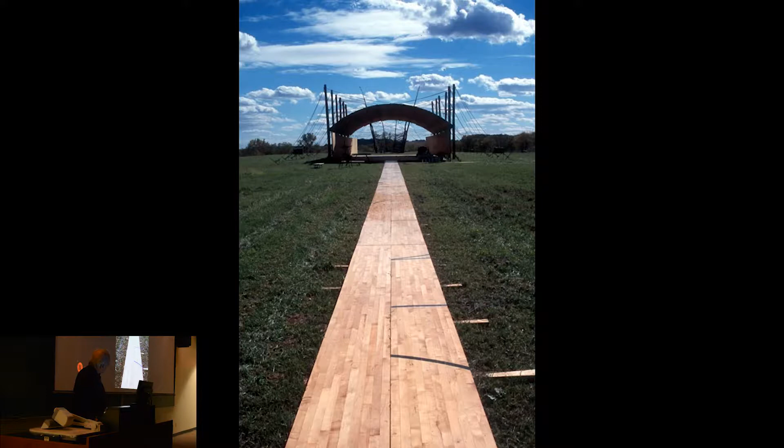So this is a wedding chapel built out on a farm field out of hackberry and felled cottonwood trees, directly on axis with the barnyard and the farmstead where the bride grew up. The idea was that the bride-to-be would walk down this temporary placement of basketball flooring, repurposed, under this great lamella arch to the chapel itself, where the event would take place on an October evening.

Following the ceremony, the chairs would be pulled back and the event would take place under this great lamella arch. We wanted to make something that didn't involve beams, basically something we could just make with skill saws. So it's made completely out of 2x10s, 75 feet long and 40 feet wide, and it's clear span, as you can tell. Once you get the calculus applied to figure out all the cuts, it was relatively easy to do.

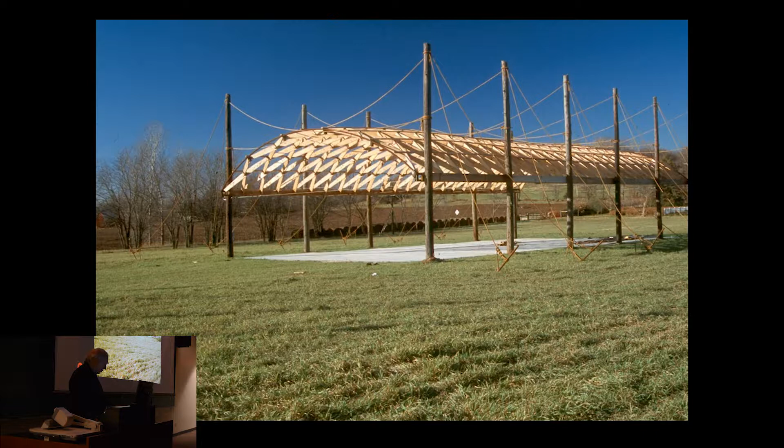So as the father of the bride, when my son-in-law-to-be asked if he could marry my daughter — he's the one on the right over there, and that's me on the left — I said, well, you sure can, Ian, but we got a little work to do first, son.

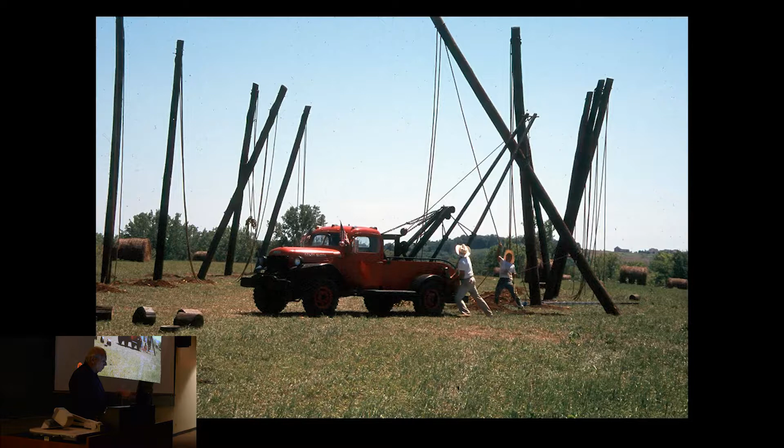So these are repurposed telephone poles from a utility or highway expansion, and I was able to use those. Those are sort of in stock, if you will, for the way I work. So we put that up and then went ahead and built the lamella as I've described.

and us. At that time, there wasn't anything that we designed that we didn't also build, and there wasn't anything that we built that we hadn't also designed. There are a few exceptions that you'll see here momentarily, but generally speaking, we do everything. It was really the only way I could find any comfort level within the client base that I had available to me, which was fairly limited.

In the end, it turned out we would sort of appeal to their pocketbook. They wanted something that was a little bit different. If we were going to be able to do all the building, we could save them some money, and that appealed to them probably more than the design, quite honestly.

I live on a farm, so that gives us a lot of freedom. There isn't much of anything that we can't make. So here we're welding steel trusses

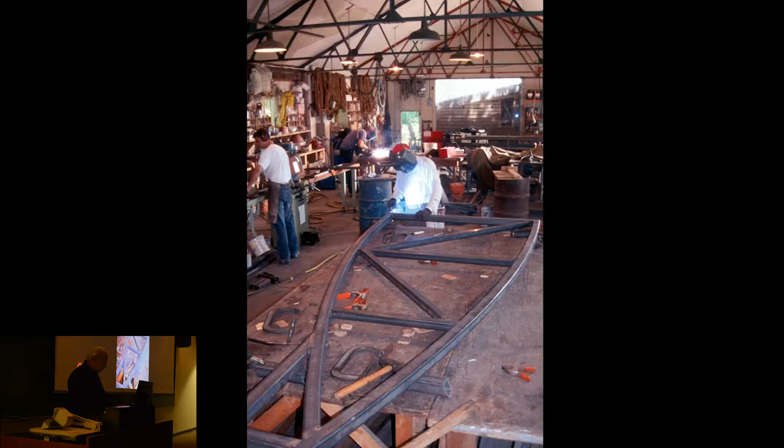for another house. We recycle, repurpose a lot of materials. All of this you see here is stainless steel. We bought out a cheese factory that had gone out of business, and all the stainless funnels and fittings and things like that we just bought for the scrap price. So we can make things out of that.

Make our own doors and windows. I don't need a steady diet of this, and frankly, I'll never do it again. But for that point in time and what we were trying to do with that particular project, it worked out well. We've done it maybe 2 or 3 more times since, but especially with the improvements in window frames—and these are incidentally thermally broken—we can't compete with industry.

So a project like this would be one that we would do in Lawrence, Kansas, in town. We bought a site and moved a house off of it. This is close to the university, so that we could produce this building.

A tower, again, reminiscent of these kinds of things that we see out in our landscape about every 15 miles apart. That establishes and begins to anchor that language.

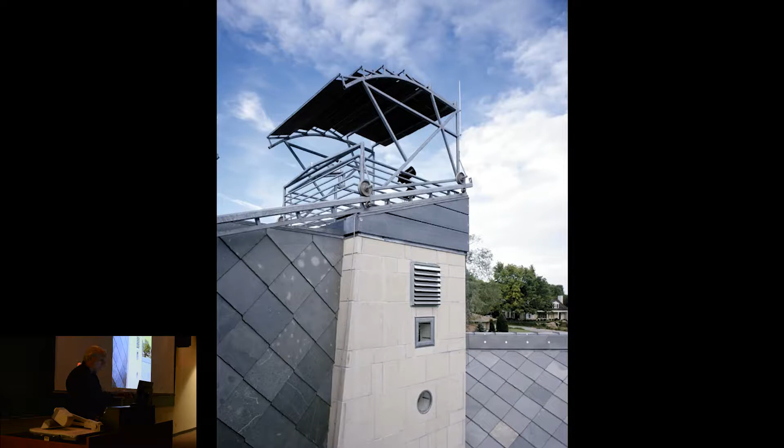I'll do anything to sell a client on an idea. So we'd usually trick them into thinking something that would work for them would be just for them—make it special, pretend it to work. This moves back and forth because they also had an interest in stargazing, and they could slide this thing back with just a boat winch. You can see right up through dead center on top of that tower, there's a mount that we set up there for them to bring their telescope and do some stargazing.

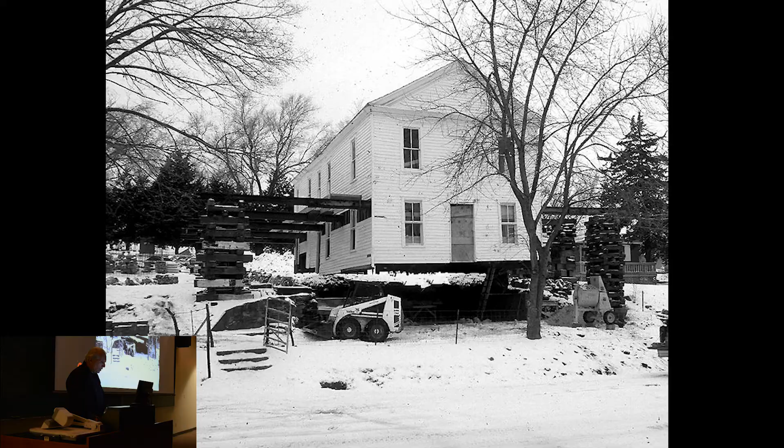We've also restored most of the Kansas historic sites, which is something I'm pretty proud to brag about. Of course, we didn't design those, and we do all the building and work with the state on it.

I had come from New York to Kansas to teach, and so I had a little bit of experience in historic preservation. When I came to Kansas, historic preservation was sort of a novel idea. They hadn't really restored anything.

Events that took place at this building led to the term Bleeding Kansas, and it was pretty significant, a turning point that ultimately led to the Civil War. So this is called Constitution Hall. We picked that up, dug out underneath it, put everything back under it.

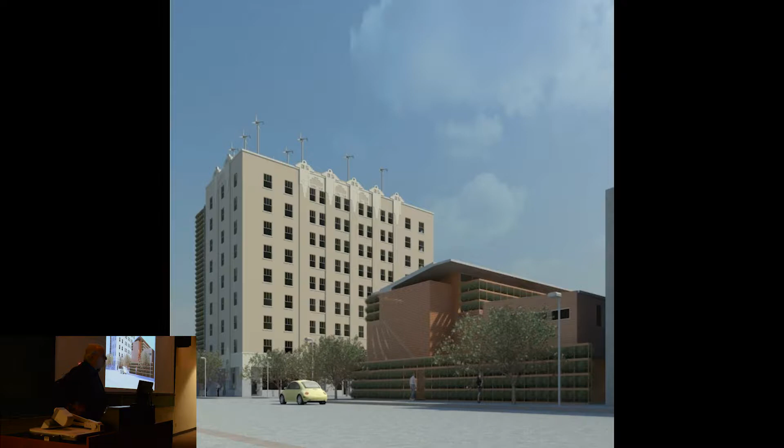The problem with doing all of this is that you sort of become your own worst enemy. Twofold: one is, because you can do everything, you don't know how to hold yourself back. It's like, oh, we're not going to use that toilet paper holder, we'll make one, and you just can't rein yourself in. You have to constantly check yourself, because these things lead your life.

We're all working with budgets, we all know what that's like. So the other disadvantage to doing all this work, despite all the romantic appeal of doing your own building, is you're very limited by a geographical area. I like to be home at night, and so we eventually kind of saturated our area.

We're still doing work there, but so when a developer, in this case in Clovis, New Mexico, calls and says, hey, I've seen your work published, we'd like to work with you guys, you wouldn't say no. It's the design that motivates me. I happen to be able to do the building, so there's no reason for me not to do it when the time is right. In this application and others since, I'm quick to grab hold of the design opportunities.

So in this project, we did the restoration of the Hotel Clovis, which is what you see in the background there. It was the tallest building west of the Mississippi for quite some time, all the way up through the 1930s, I think. And then in the foreground is a series of housing buildings that we did that would ultimately bring greater density to the downtown area. So it's a combination of a couple of projects we did there in Clovis.

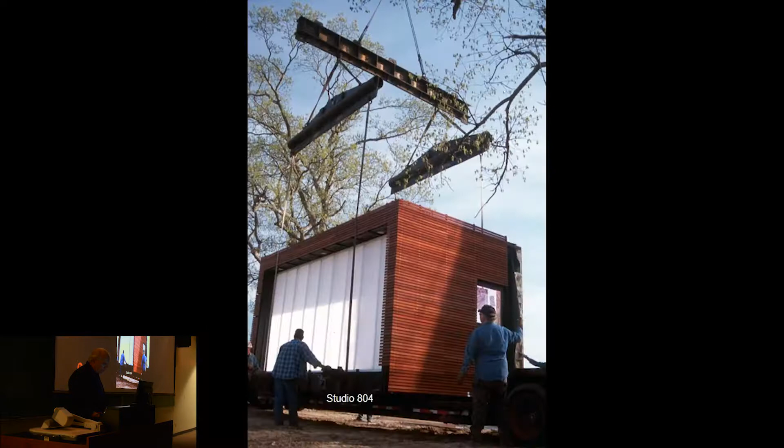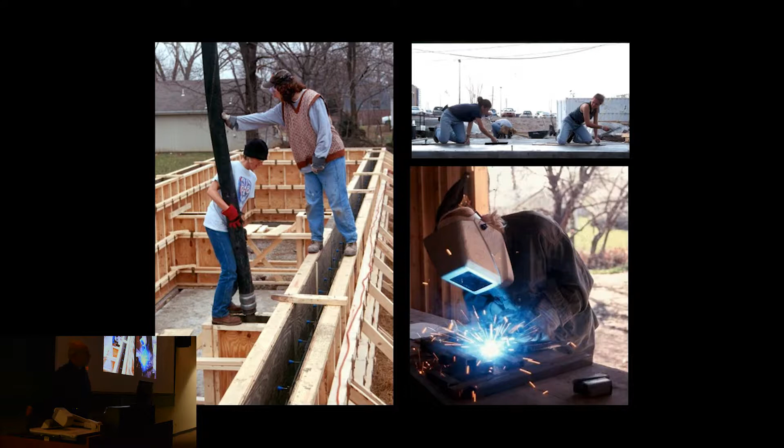So that's what I do with Rockhill and Associates, but I wanted to emphasize today what I do with Studio 804, which is building with students, and so I can go through this pretty quickly. We do everything, the same kind of thing I just shared with you that I do with Rockhill and Associates, we really don't subcontract anything.

A lot of times it's a judgment call. The students that I have vary from year to year, and my comfort level with them varies every bit as much. So it just depends on where we are, but generally speaking, the goal is to do as much of the work as we can possibly get done.

So I started doing these houses in Lawrence. We had done a couple of little projects out in the country before I started on the houses, and I had been teaching a course called Architecture 804. You might tell from the design studio, and it was the last design studio that students would take before they would graduate.

And it's the worst teaching experience you can have. I'm not sure if the colleagues here at San Antonio would agree, but you're literally blocking them from getting on in their lives. They already know it all, they want to work on their portfolio. I said, oh, come on. And so I got good work out of them, but I was always a little frustrated.

I had a project Rockhill Associates couldn't get to out in the country—putting a roof over a schoolhouse. We were going to do some rock work, but then build this steel roof over it. I asked the studio if they'd be interested, and they said yes. I couldn't believe what I saw—they were like drunk on the experience, pulling their cars around at night so they had headlights to work later. It was just amazing to see.

You teach long enough and you begin to see those little things that flourish. I was immediately taken by it, so I tried another little thing the next year. Pretty soon I was thinking, well, if I'm going to make this work, I better talk to somebody.

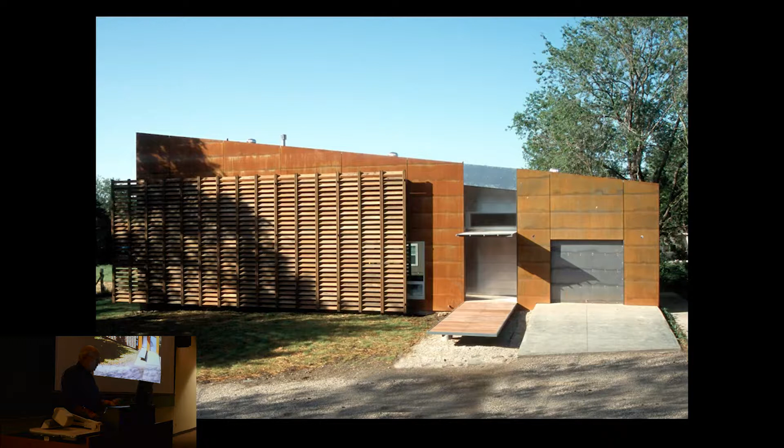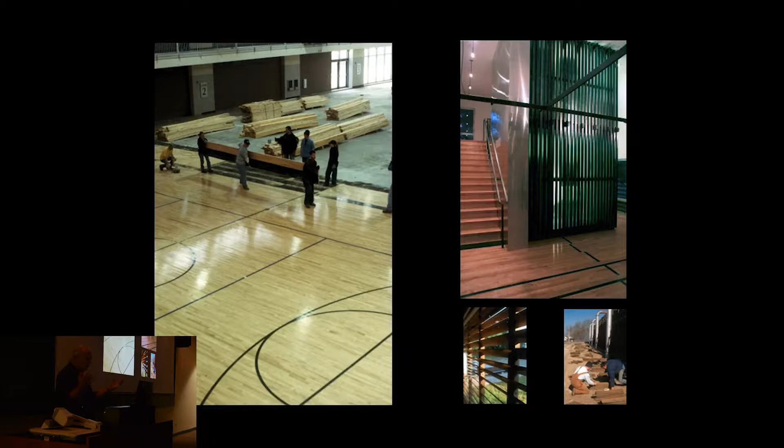This is now the fourth year—this would be our fourth house. We're still working in that affordable aspect of what we're doing, selling these houses for around $125,000, and repurposing a lot of materials. By now the architectural profession in the region knows what we're up to, and they want to support us.

In this case, three basketball courts were donated because of an insurance settlement—the architects called and said, hey, they're taking this out, do you want it? I said yeah. We were there within half an hour, hauling the wood back out. We used a lot of that basketball flooring, put it down free throw lines and all, and it just looked great. It worked out very well.

I don't do this to make them builders by any means—I do this to make them better architects. I also do it because over the course of my teaching career, I've just seen an amazing cultural change in what's happening to us.

I have very different students now than I did a long time ago. I think a lot of it comes from the age of consumerism, where you can get anything you want. The kids who built this little tree fort had to struggle to get a board up, figure out how to fasten it, cut something, keep from falling through. It may not be the best example, but this is now the stuff we get, this is what you see all over.

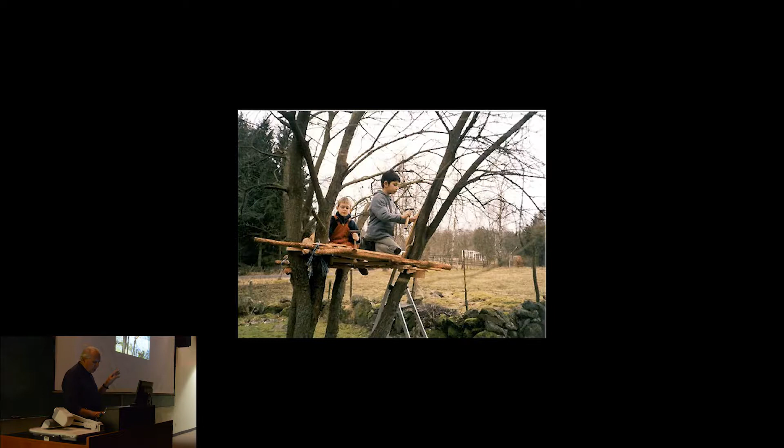And these things are very likely prohibited from most neighborhoods because it would be a little untidy. But these other things are totally acceptable. And so these kids then are sort of denied that experience.

Again, probably not the best example, but I come from an age where this is how we lived. We were always doing stuff with cars, et cetera. I'd be happy to see a kid in my studio take his or her hubcaps off. It would be great, just the idea that you'd make an intervention into what you're given and try to make it something special for you. I don't see that much of that.

Just can't help but point out that in Lawrence this year, they opened a Halloween costume shop. This is a little town of 80,000. You used to create a toga out of a sheet, whatever it is that you would make, and you'd have to think through and solve very simple problems, but you would engage design. But now, because of consumerism, you just go and buy whatever you want at the Halloween shop.

So all of this is getting away from us, and I think it affects the way in which young people think. They can do many other wonderful things, and I apologize to anybody here that feels insulted by that, but it's a very different world.

And I'm not the only one who thinks that. The literature is all over the place. All of these books are basically addressing the same thing. So anyway, I'm not alone.

Anyway, I feel like whatever I can contribute to it. In fact, my students, when I said I was coming here, said, you're not going to tell them about any Studio 804 moments, are you? Because they have it all day long. The things that they do just cracks me up. It's just their own innocence, but they haven't been exposed to a lot of things. So I'll show you one or two here as I get along.

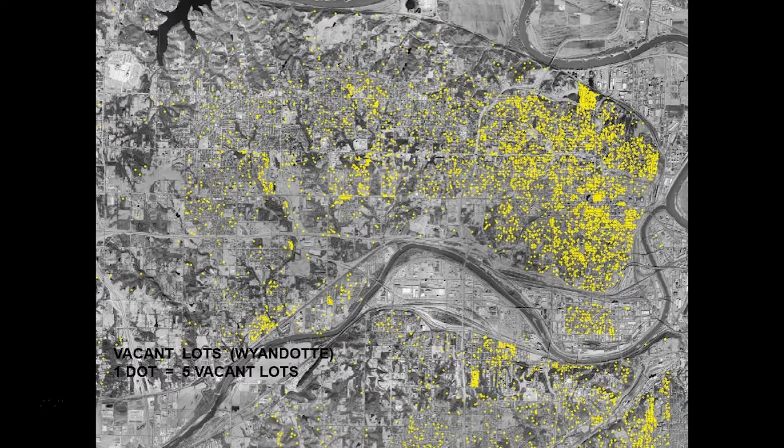So anyway, we did the 5 houses in Lawrence, and we kind of ran out of property. I didn't want to do any more projects out in the Habitat for Humanity subdivision, which was the last one we had done, not the one I shared with you, but one I haven't shared.

And so we went to Kansas City, and Kansas City is like a poster child for the flight to suburbia. I know Detroit gets all the attention, but these yellow dots represent 5 vacant parcels. It's not vacant of structure necessarily, it's basically vacant in the tax base. So basically, Kansas City, Kansas is decimated.

So we went to the CDC, the Community Development Corporations, they had about a dozen of them, a glorified name for neighborhood associations. I went to them and said, I've got some eager builders, and brace yourselves, here's what we do. It might look a little different, but what do you think? Wendy Wilson of Rosedale Neighborhood Association said, yeah, this is all right, let's go for it.

So anyway, then I was faced with the problem that my students were going to be commuting back and forth on I-70, the interstate, at 12 o'clock at night, and that didn't sit right with me. I didn't want to build it on site. I wanted to figure out a way to minimize that commute.

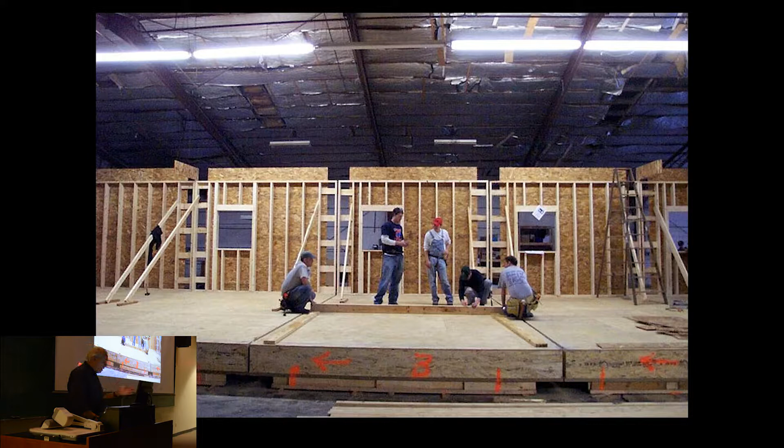So we seized upon this idea of prefabricating it. At the same time, the entire world became fascinated with prefabrication. I'd like to imagine I had some connectedness to that, but it was quite accidental. I just did it to get through this, and suddenly everybody's interested in what we're doing, which was nice. So we figured out a way to make it in a warehouse, an abandoned warehouse, make the whole thing, then truck it to the site and boom it into position.

Finish it out. This is one of the first that won the Home of the Year award. We're competing in a blind submission against professionals with $5 million buildings, and we sold this for $145,000. It was nice to see this shine in light of all the competition. I'm happy with that result.

We are completely independent of the university, so I'm not subsidized. We're literally hauling 2x4s and plywood and everything in our Hondas back and forth to the job site, anything to make this thing work. And I continue to be completely independent of the university.

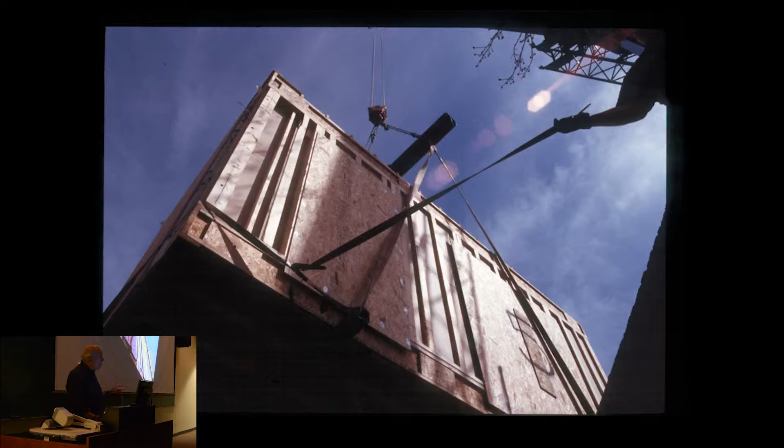What I'm starting to do now is realize that I can sell these, but I have to try to sell them at market rate if I can. I need to get as much out of these houses as I can, so I can continually slice off what might be construed as profit to put back into the program.

So eventually I could become my own developer, because at this point I'm still working with the community development corporations, and they're a little concerned, because even though the work looks different, they're beginning to get a reputation. They don't like the kind of pushback. This is all very conservative where I live.

Anyway, we sold the first one, word of mouth, that was great, and we sold the second one. This is the third one now that we did, and it seemed to be going very well. They were all sold, as I've said, easily. We never had to advertise anything. Once we got on that word of mouth, it seemed to work extremely well.

Then people were beginning to get in line, writing to me an email saying, hey, we'd like to have one of the houses, etc. I mean, they can see a good deal, because they understand the labor is free. I'm still trying to get something more out of it than just the materials.

But anyway, Kenny and Leo were happy, couldn't have been happier. They're willing to put aside the reservations that most realtors give about resaleability, schools, all the kinds of things that discourage people from settling in these older urban neighborhoods. But we were finding these young people, they all read Dwell magazine, they want something hip. They don't care if they're the only non-English as a first language couple in a 20 square block area.

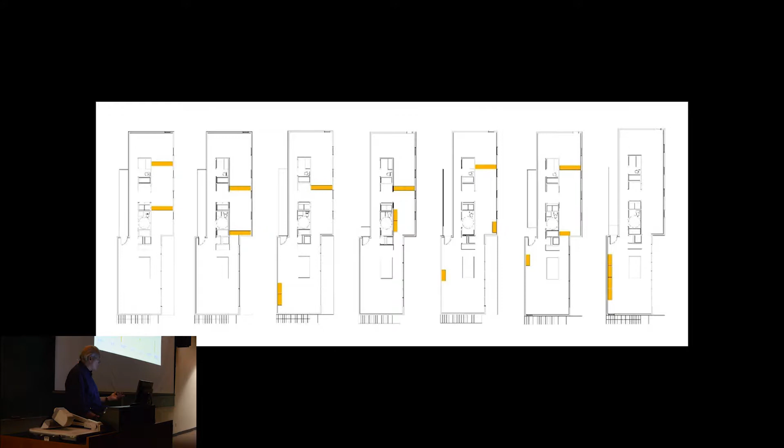So I don't expect you're able to see this very easily, but when I take the appraiser through, I've got 1 bedroom, 2 bedrooms, and 3 bedrooms because we slid those cabinets apart. When I take the urban hipster who reads Dwell magazine and wants loft living, we've moved all the cabinets down over here, so it's a big open area, and you're like, yeah, we like this. So we get the 3-bedroom appraisal, and we can trick the appraiser and pull these things apart, and it has that kind of potential, and it actually did work. We sold this last one for $200,000.

So we went down there and made a presentation. They had already decided that the city was going to build back green. Bob Berkebile, whom you may recognize, a leader in sustainability, his office BNIM in Kansas City had already made contact with them down there, and they were beginning to come back to build green for any of the city buildings. So we said, yeah, we can do that, let's go for it. This was the first time LEED had really begun to be something we could work with to make submissions.

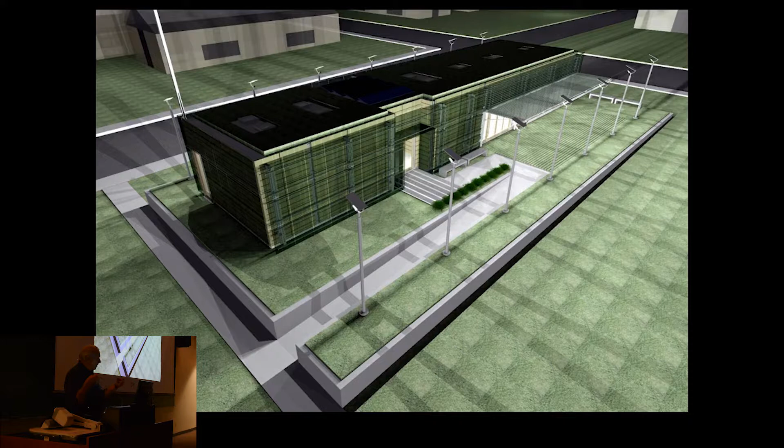So they put together a little art center board, and we met with them and put together the project. First, we had to get 4 contiguous pieces of property that we could take ownership of through the art center. One person was in jail in Junction City, and we had to get him to sign the deed over. We're still starting these in January, and we're going to be done, so this is pretty intense. Students are getting the deeds signed over. We're getting the property, 4 contiguous ones that'll give us a broad south exposure, which is what you see here.

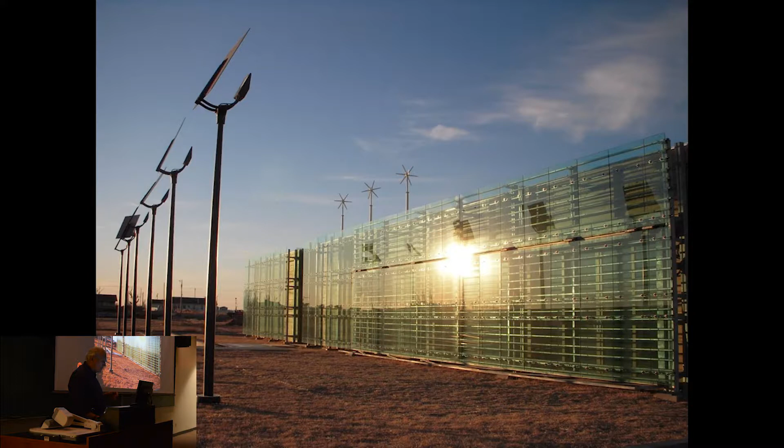And so this is the end result, is what you see here in glass, looking to the south. Now, just in case we didn't have enough on our plate...

In Kansas, right next door to us, no more than 15 miles away, is the largest, now former largest, production ammunition facility in the world. A 10,000-acre site called Sunflower Ammunition, where they would make loads for howitzers, Navy ships, bushel basket-sized loads, not bullets. 10,000-acre site, 5,000 buildings, and this is now going back through the process where they're trying to get it back into the public realm. They've demolished some of the buildings. We went to the attorneys basically in New Orleans and said, hey, we want to get some of those materials. You can imagine what we had to go through to get there, but the poetry of taking what had been basically a magazine building, one of 5,000 that were on the site, and putting that into the art center was a little too much to resist.

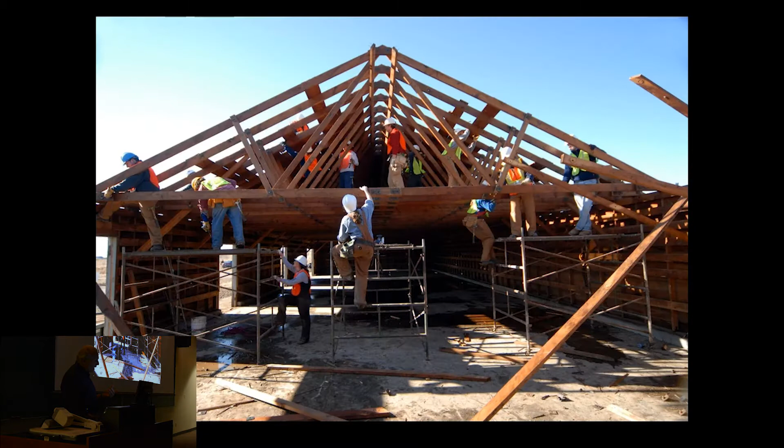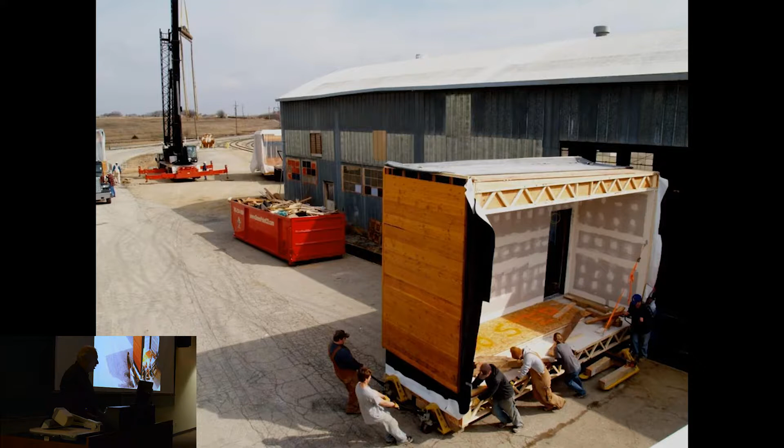So we went through, stripped that building out, brought it back to our site, and eventually used it to put together this, the same kind of dance you've seen ourselves do before. Now we're in a different abandoned warehouse, prefabricated in the warehouse. This time we took the side of the building out, loaded it with a crane, head down, raining hard. March 17th, St. Patrick's Day, we went down there. We were down there for 2 months putting this all together. Take it down, drop the trailers.

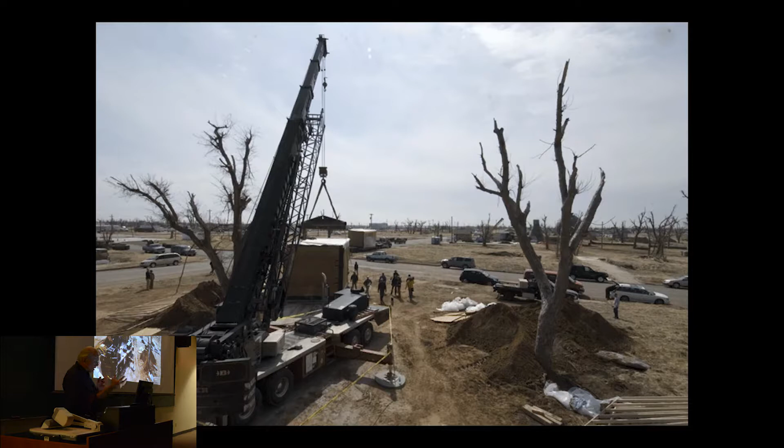So all the trees are torqued, we have to take all the trees out. It was an F5 tornado, so 200-mile-an-hour winds.

So we load these off and get them up, and then nudge them into place. To get the slings out, you have to leave them apart, get the slings out, and then we just roll them into position.

The only other thing that was back now was they were starting to rebuild the water tower. It too had been knocked out. You can see us in the foreground, and this is the old water tower that had been taken out.

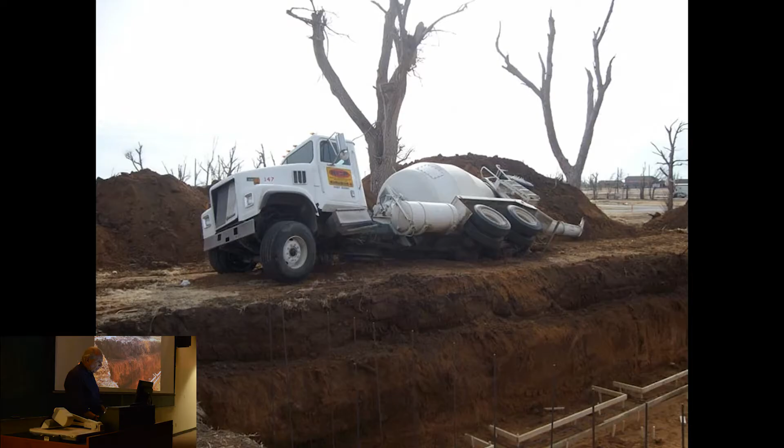So it's also a minefield. Nobody knows where anything is. This guy thought he did. So you've got tornado shelters, septic tanks, all kinds of stuff - everything is gone. You have no reference points anymore. This is actually our job, and he insisted that we were in the way, and the truck went in.

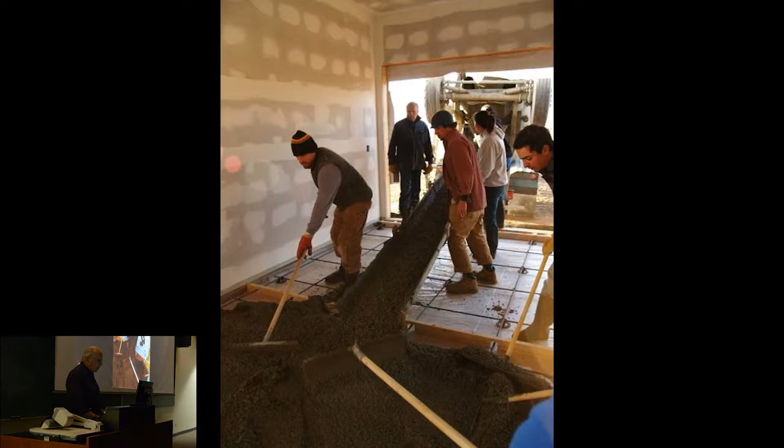So you go down there at that point in time and you talk to the concrete ready-mix producer about fly ash, and he's like, what's that? And so I explained - you're going to get in the business here, you may want to find out what's going on. And they did a remarkably good job. We probably placed over 200 yards of concrete, all of it with 20 or 30% fly ash, so they did a good job.

So concrete slab for thermal mass, all passive solar, south-facing windows, calculated shading. And then the idea that this would open out to the public was something I thought was really important. The artists don't care for that because the light affects the artwork, but that wasn't the only thing we were doing there.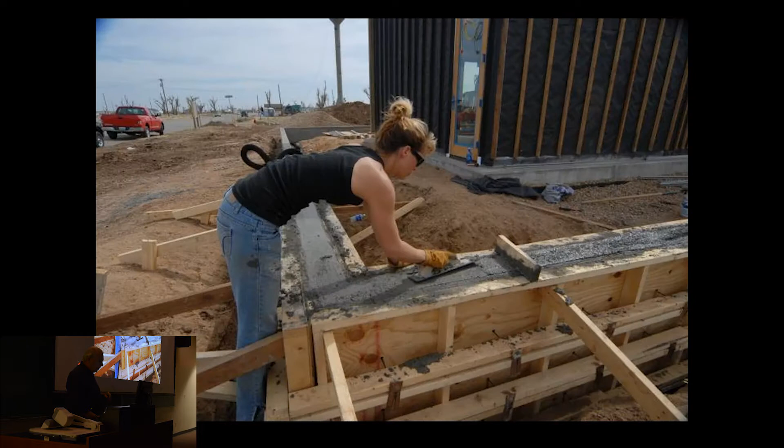Now the elevation in that part of the country, in Kansas, changes about a half an inch over 400 miles. I mean, it is really flat. And we just couldn't quite put this building down on that same ground. We wanted to elevate the building at least to give it a greater prominence.

And the other part of that was it would enable this to happen, because all that wall is purposely designed at 16 inches, which is kind of the height of a chair. People could sit on it and use it as you see being used here. And that was really an important part of this.

The sustainable aspects of this include 3 turbines. We could have done it with one big one. It looked kind of lonely. 2 looked like a couple. 3 looked great. And these were kestrels. They're from South Africa. Just the design of it looked appealing to me.

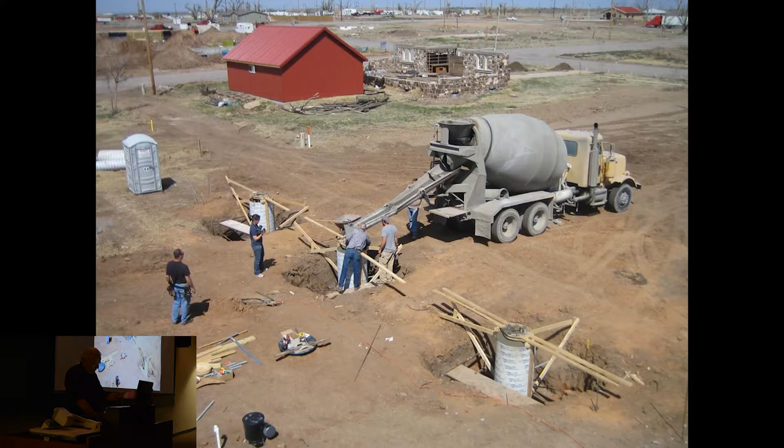So here we are putting the foundations in and getting ready to put it up. We figured on the other ones, we put the turbine on before we put the pole up. So that's a Studio 804 moment there for you.

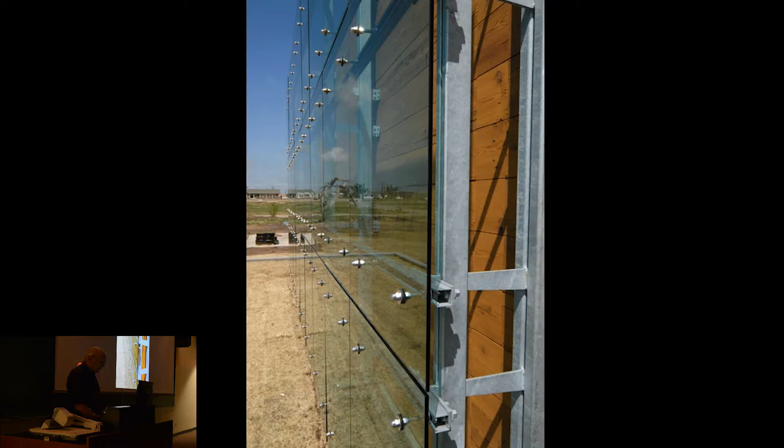So all glass on the outside, it's all 3/8 glass. This is from Suntex, it's from Vitra. I'm blank on the name all of a sudden, but anyway, what it does is it filters the UV rays.

So on the wall you see in wood, we have the wood from the ammunition facility, and then we filter that with these panels of glass that have this UV film in it that helps minimize the deterioration of that wood from the sun. And it also kind of thumbs our nose at the tornado business. It's very heavy glass, it's 3/8, so there's the finished product.

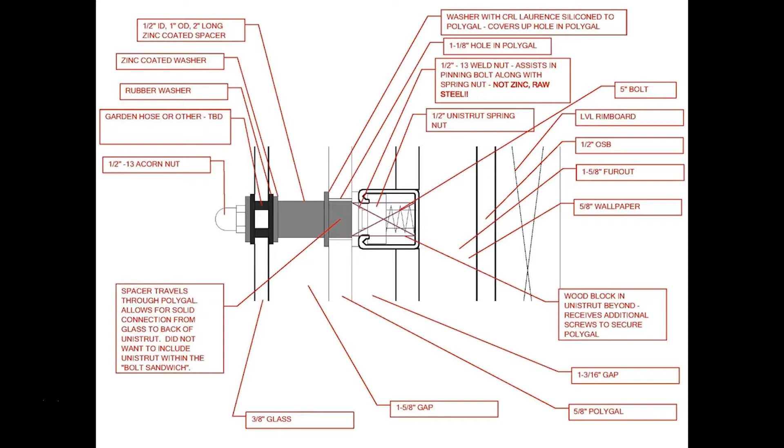You know, this detailing stuff is always fun. I think there's one up there that says garden hose. We had to have some kind of little buffer in there, so we tried to make these things up. Those kind of spider fittings that are now everywhere, they're just a little too predictable, so we wanted to make something - make a project out of it.

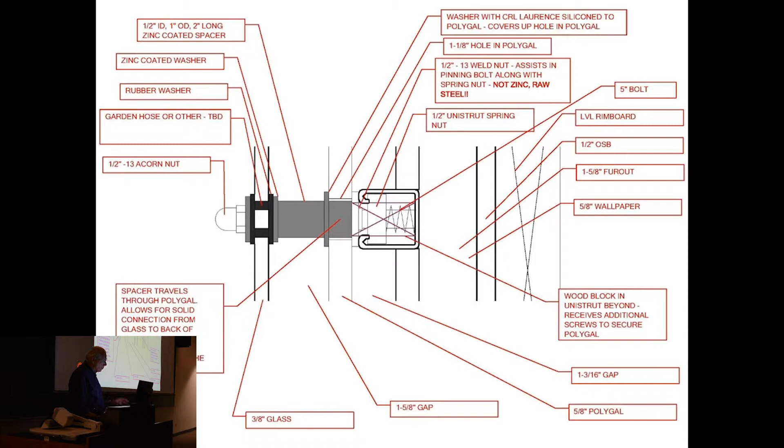So then I stagger back up to school, you know, because we finish these things and then there's a whole other group of students - oh, what are we going to do, you know - and so I'm like, oh my God, I'm exhausted.

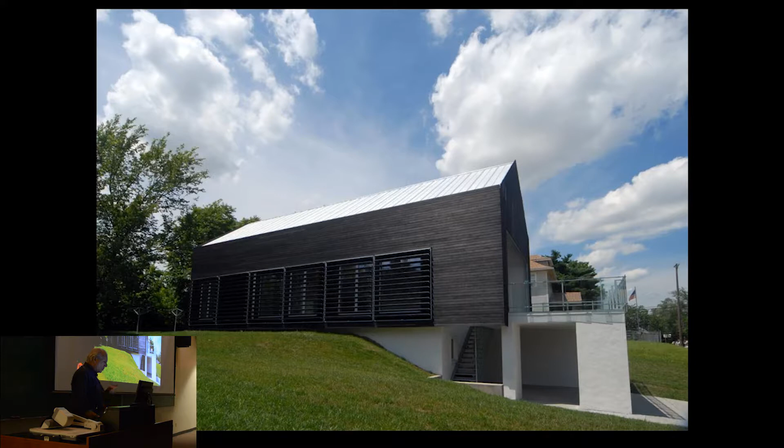So now this is going to be a LEED Platinum, and this is also passive certified—the first passive certified project we did. And this is now on another piece of property.

Now we just have enough money. I've graduated from having to go to these CDCs. We have enough money in the bank because I've been able to do these projects that I can save enough that I can basically get the property.

In this case, this property, all in the inner city, is $300 for two lots here. It's through the Homesteading Act—they're trying to infuse interest into the urban area, so they'll give you the property basically. $300 is nothing. So we get the property, and then we build a house, and I can sell it, and we start getting a little bit more profit. So I can basically be a developer, which has always been my goal.

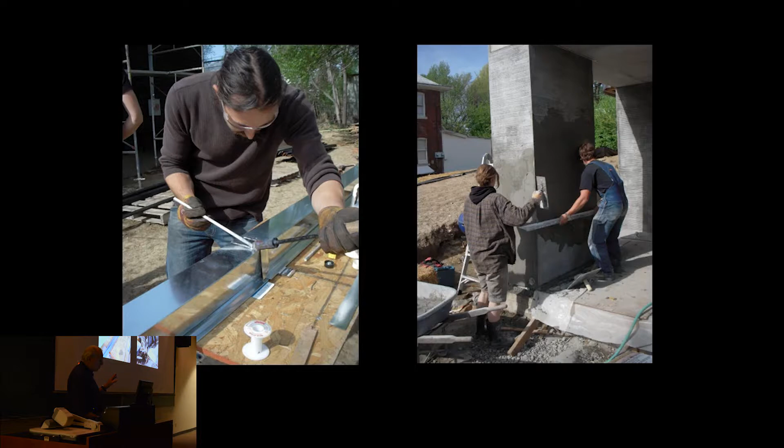So we do all the traditional crafts as well—soldering gutters, three-coat stucco. I don't care for acrylic stucco.

By now, we did all that work in Greensburg, and the dean of the school was a little red-faced because parents would come—we published internationally with that work—and parents would say, they're in an abandoned warehouse, there's no heat, the girls are having to go to the Kwik Shop to use the toilet, you have to run an extension cord from the back of the Kwik Shop to have power, or generators, whatever. Can we do a little bit better than that?

So anyway, he ended up buying and paying off solar as well. Passive is a little more difficult to attain—passive house certification—than LEED, but that's not to minimize LEED either. The passive stuff really works pretty well.

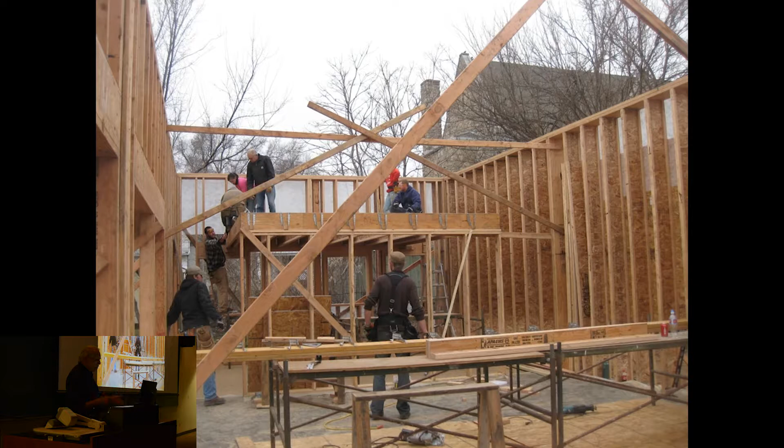So here we do flat work in order to get some thermal mass upstairs on the floor. TJIs we use for the depth of section to increase the thermal performance in all the walls. Blower door test before we close in, tight enough.

You can see all the construction joints have been caulked. We go around with a smoke pencil to see if we fail, to get that as tight as it should be. Here's a Studio 804 moment.

The floor—we do the flat work and then we would put curing compound on it. Curing compound is like the consistency of honey, and you put it in a pump sprayer, spray it out evenly, and it scuffs off over time so the moisture isn't taken out of the slab too fast and causes it to crack.

I just can't be there to do all this stuff, and garden sprayers are notoriously difficult. I said, here, pour to the students—pour this in here, make sure that you get it as even as you can.

So they think that the end of the garden sprayer is actually a plug that's in there. So they take that little thing out that causes the fan, and then the stuff comes shooting out like a fire hose, and they thought, well, yeah, that's the way it's supposed to work. So it's just all over the place in various thicknesses, it's just gummy. So I come in the next day, and I'm like, what did you do? Oh, we thought that was the way it's supposed to be.

So I have Leon just livid, and I'm like, oh my God, okay, we're going to build a house, we're busy here, we can't mess with that. So we build the whole house because we run out of time, we end up having a big open house. Everybody comes in, and they go, man, the floors are awesome, how'd you do that? And I'm like, oh, yeah, it's an old trick. So, anyway, yeah, stupid things that happen that end up working out quite nicely.

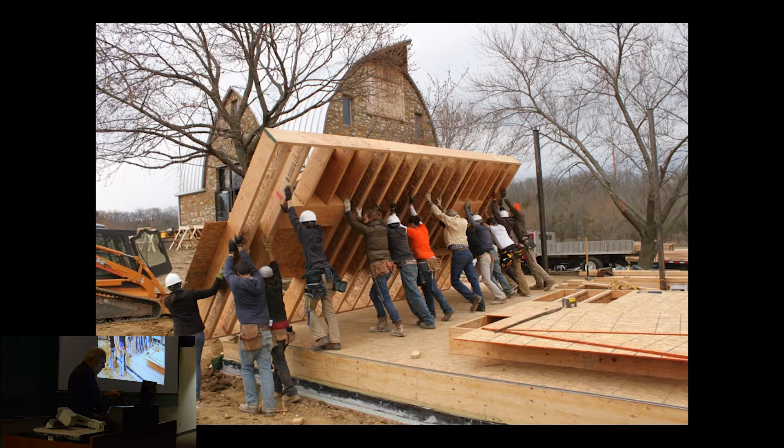So same thing, big thick TJI, standard walls up, maximum insulation. We make our own curtain wall in this example. Curtain wall is normally 2x4 aluminum extrusion, and other than increasing the depth, it's also about as grim as garage doors. But the idea that we can make this at a 5/8 inch bar stock, we could still get a thermal break because we found an extrusion we could use to do that with. So we make our own curtain wall, and that's what you see us doing here.

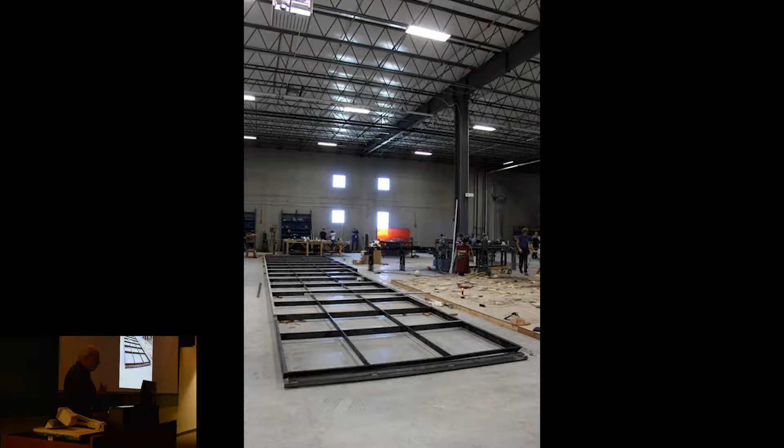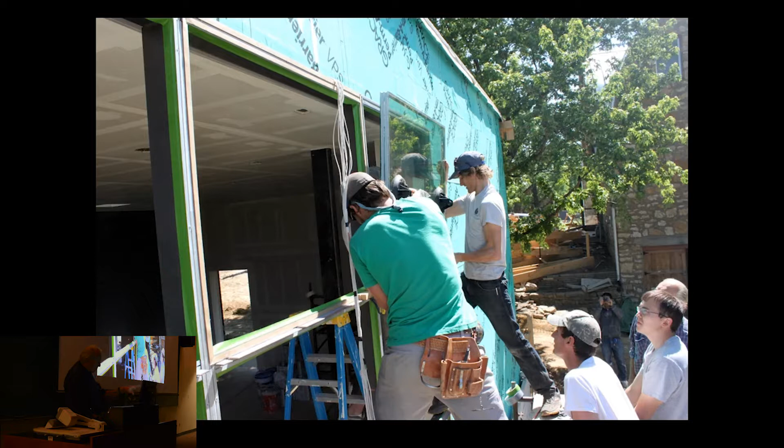And then we put this up. This is electrochromic glass, so it's going to be self-shading. I'll show you how that happens in a moment. But all the glass gets wired with low voltage wiring. We put that in, so they're tied to our GPS coordinates. It's controlled by a motherboard in Minneapolis, and they know when the sun rises and sets. So they can control the shading of it per the season, and they can even take into account if there's a tree that would block it. So it's pretty interesting technology.

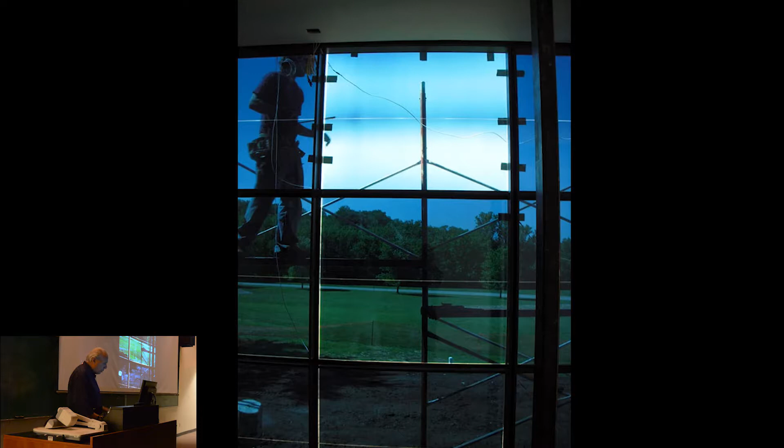And again, because we're doing these kinds of things, we get industry looking favorably to try to partner with us. So it works out pretty well. And for once, I didn't have to do louvers, because I'd spent my entire career doing louvers on the south side of the buildings. This is a 10,000 plant living wall that is thriving.

This is Valcucine, which is an Italian line of cabinetry. They also worked with us. All of their line of cabinetry is glass and aluminum, all 100% recyclable. So here's the limestone - these are tailings that we get.

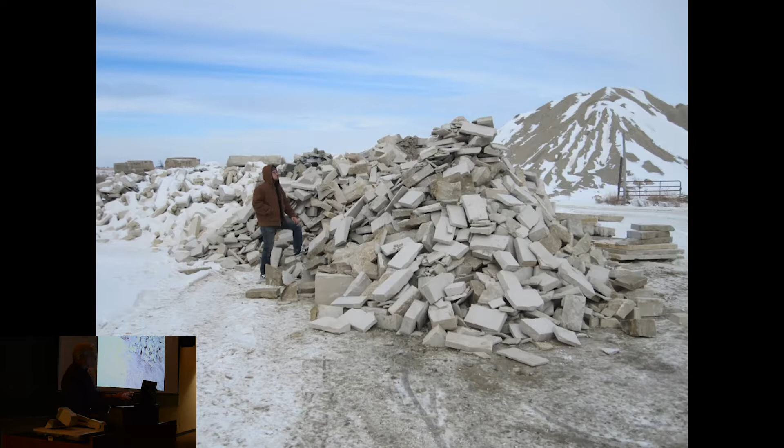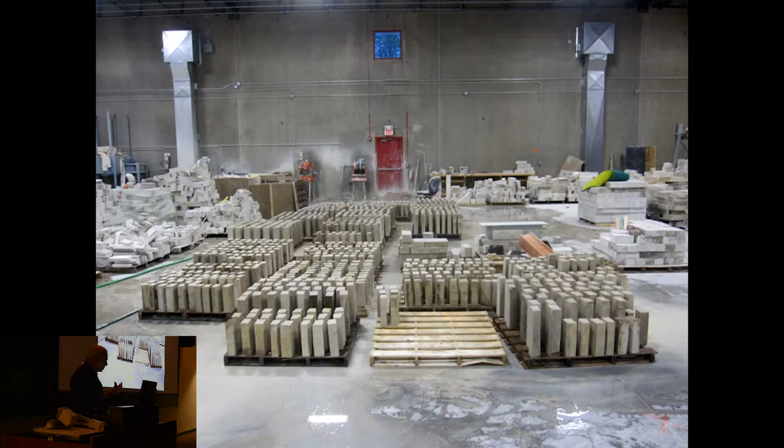So the limestone people were happy to just have us pay for the freight and haul it off. We bring it into the warehouse and cut it all up into a coursing that we could use. So that's what you saw there, all made out of limestone.

Then we did another project over in Kansas City at the community college. They wanted a sustainability center. Again, the previous one was LEED Platinum, and it was also the first commercial building that was Passive House certified. So we went and did this one.

This one we made out of chalkboard slate, which is kind of interesting. I hope most people understand that's not faux slate. In grade schools years ago, they literally had slate, a building material, on the walls. When demo contractors knock out these old grade schools, they know it's of some value. So we bought three truckloads of chalkboard slate from Cleveland, Des Moines, and Minneapolis, then cut it all up and basically just screw it to the outside of the building.

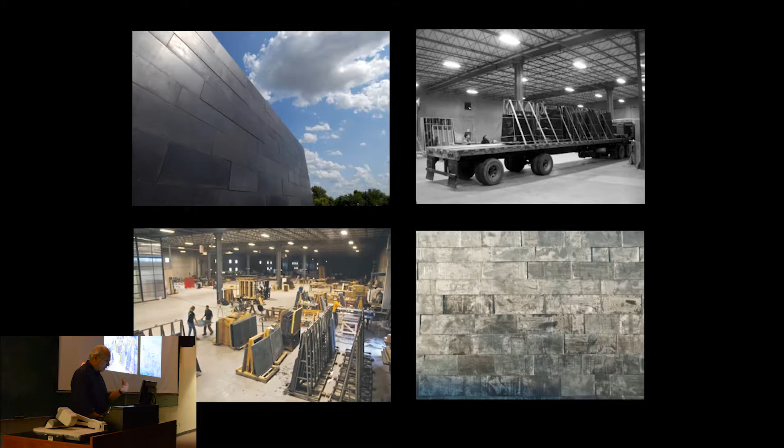This building we did is EcoHawks, and I was talking with some others here. It always takes somebody who believes in you to make these kind of projects work. JoAnn Browning, who is now the dean of your School of Engineering here, was at KU and worked with us on this building. She said the nicest thing, that we varied from the design vocabulary that the architects had sort of designated.

We have our campus architects, if you will, and they had designated a design vocabulary for this whole West Campus development. It just wasn't anything I warmed up to very easily. We were doing work here for mechanical engineering - they convert cars to battery and do research. Long story, you'll see in a moment. But this language of aluminum and fabrication was really important.

So we made the skin, and proposed making the skin, and the university people didn't see anything nice about it. They said, you can't do that. And JoAnn Browning said, oh, yes, they can. We're paying for this, and this is beautiful.

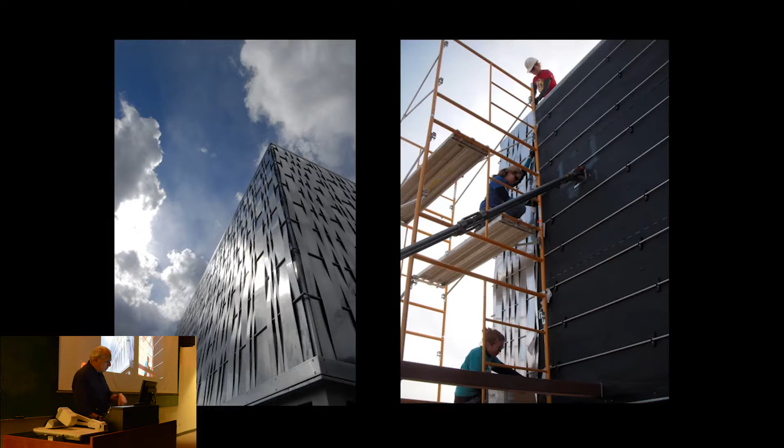So anyway, this is the skin that we developed. Three young women worked on it and really pulled it off. A lot of this came through with VaproShield's development - they're the ones who give us the rain screen on the outside, that's the black. They had just come out with a product that was basically super UV resistant.

We'd always struggled with rain screens because the UV deterioration was always our nemesis - they wouldn't last that long. So in this one, they had just developed this and they were behind us to do this project. So anyway, that's what you see there.

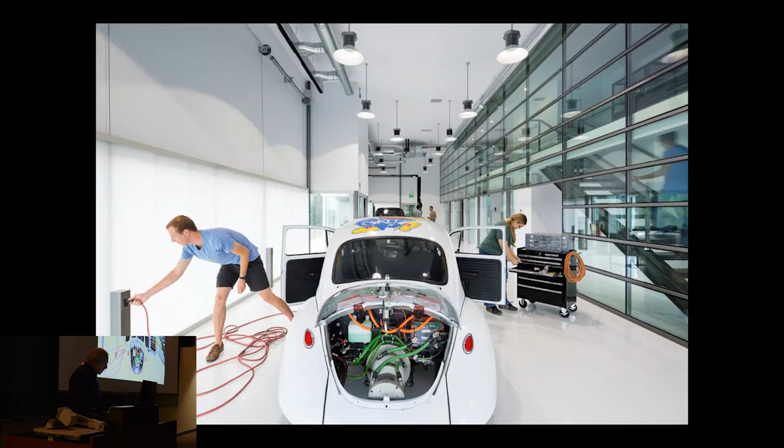And there's the finished project. This is the inside. This is kind of what they do - it's basically for graduate students in mechanical engineering who become part of this program that I've described.

So then we did an addition to Marvin Hall. This is the School of Architecture now, and this addition has been talked about for as long as I've been at that school, probably started long before that. It was built as an engineering building, and they never had anything where groups could congregate, so all of our students were taking lecture courses in other buildings around campus. We counted 23 courses where people were going elsewhere. So we got to do something - we eventually convinced the university to let us go ahead and do this addition to the School of Architecture.

Continuing with that spirit of design and sustainability, we've sort of mimicked the original structure of the old building, which is basically a timber frame inside with stone walls, limestone walls on the outside. In this case, what I thought was really important was to pursue a double wall - there are two walls here you can't discern very easily, about 40 inches apart. They're glass, and the glass on the inside is not the same glass as outside. Within that are louvers, and you'll see all this in a moment. Then this elevated floor becomes something else for positive displacement ventilation. Both of these are driven by our interest in LEED.

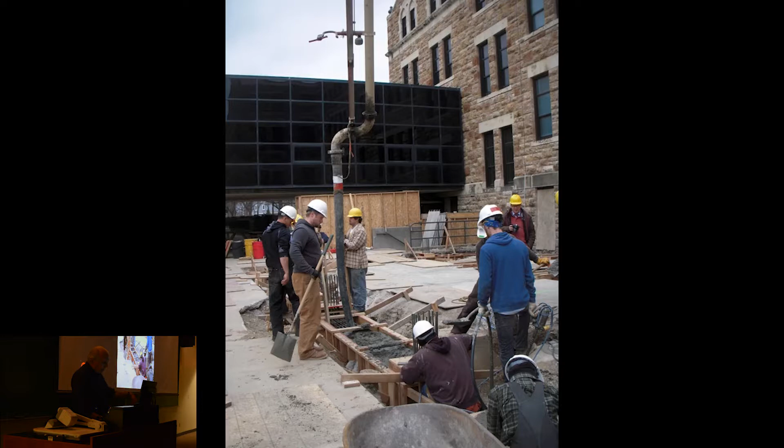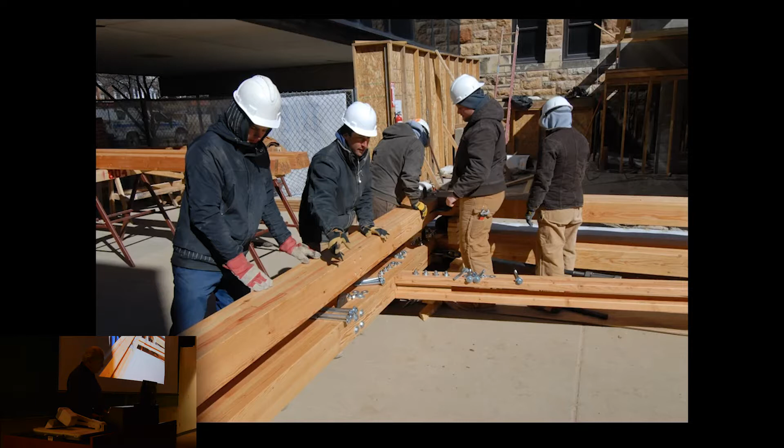So here we do grade beams that are basically standing on top of 14-foot deep drilled piers in the shale, pick up those loads, and then we do our form work to make what you see here to get the beams, and then we ultimately set the building on top of that. And then put up our own timber, engineered lumber frame on top, and then start to get closed in.

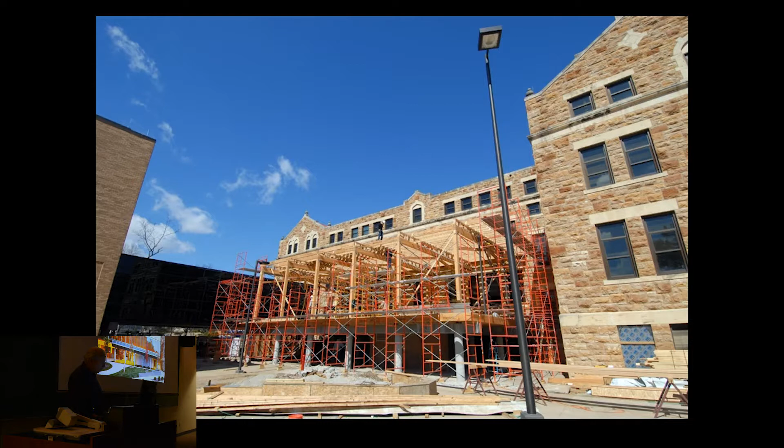And then the louvers go in. So we set the glass on the inside, then we set the louvers, then we set the glass on the outside. The louvers basically track the sun, and their purpose is not only to control the heating within the space, or lack of heating.

So if you imagine in the wintertime, when the air between the two spaces is trapped, it's like when you go to your car in the wintertime and it's been in the sun, it's actually kind of warm inside. It's not nearly as cold as it is outside. So that's the most rudimentary concept, kind of like a warm blanket.

But then in the summertime, when we don't want it to overheat, we have louvers on the bottom here behind these grills, dampers that open, and then open up above here, so you get the stack effect, and it kind of pulls cool air in from on the underside of the building. So it's kind of simple, but I'm pretty sure it works fairly well.

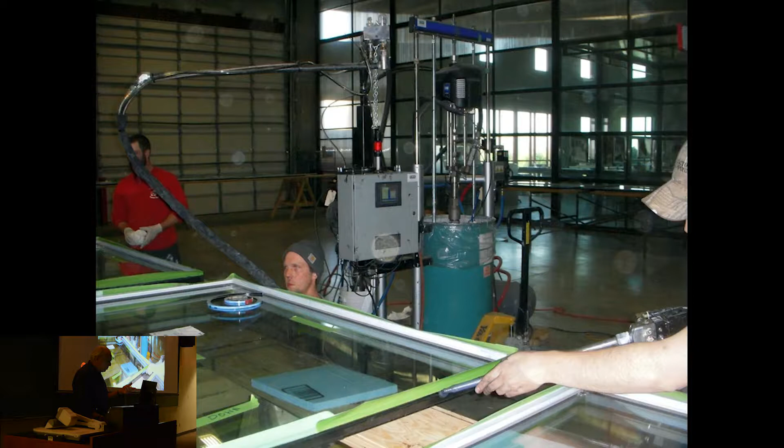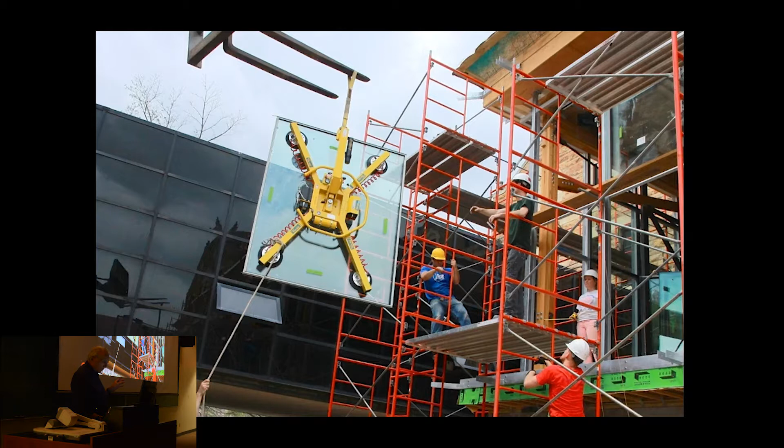We make our own glass. This is a cassette system, so we get the glass from Oldcastle. We bring that in, and then we do a silicone, an epoxy silicone. It's a clip system, and you'll see here in a moment. We bring these sheets over after it's cured, and then we boom them in. But the difference is, I like that smooth surface, not these snap-on grills on the outside.

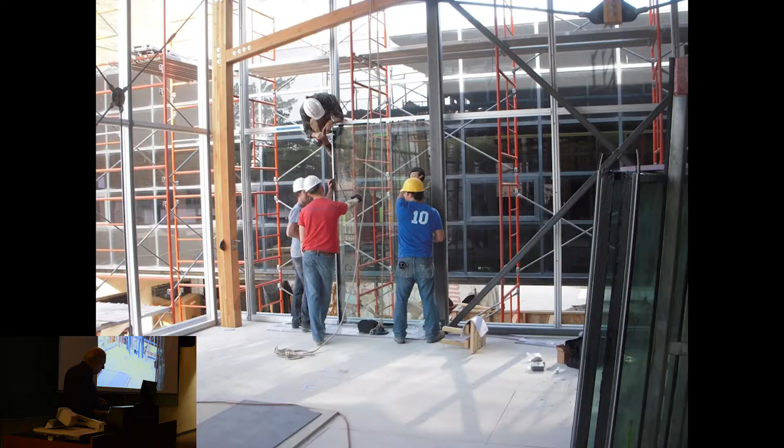So you'll see here, we set it on the inside. This is basically what we call wet glazing. So we put the whole thing together that way. Here we are setting the inside glass, set the louvers all the way around. That's clear Western red cedar, all heart.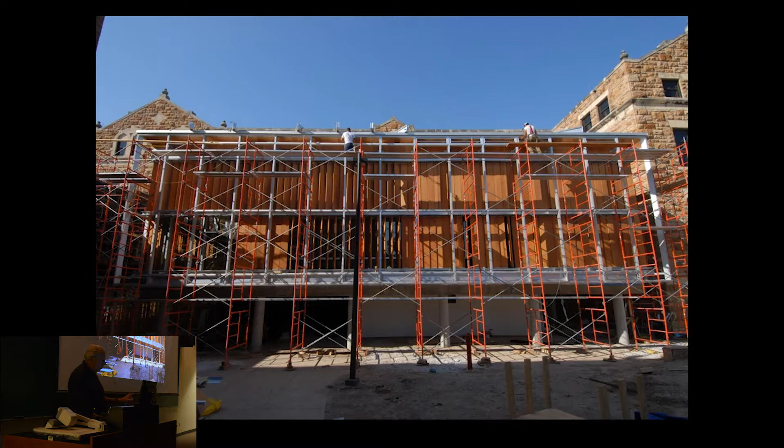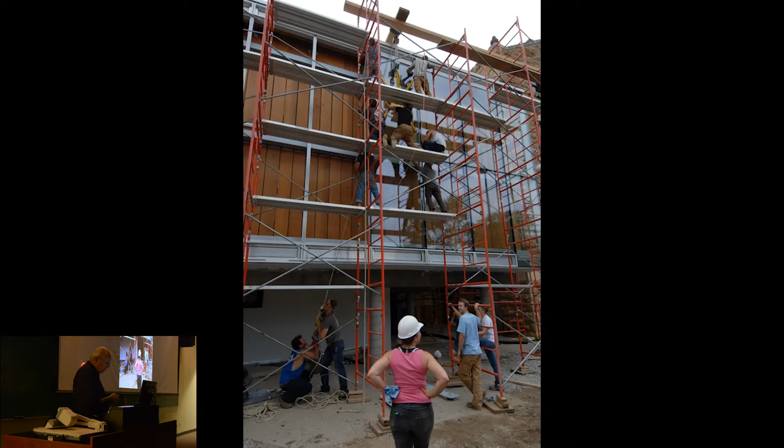And then boom these up, start getting closure on the outside. It's a little, sometimes we resort to sort of the Egyptian technique. That's a block and tackle that's pulling that glass up, because we have to have the scaffolding to work off of, and I can't get through that with the forklift, so we just pull them up with the block and tackle and set them in.

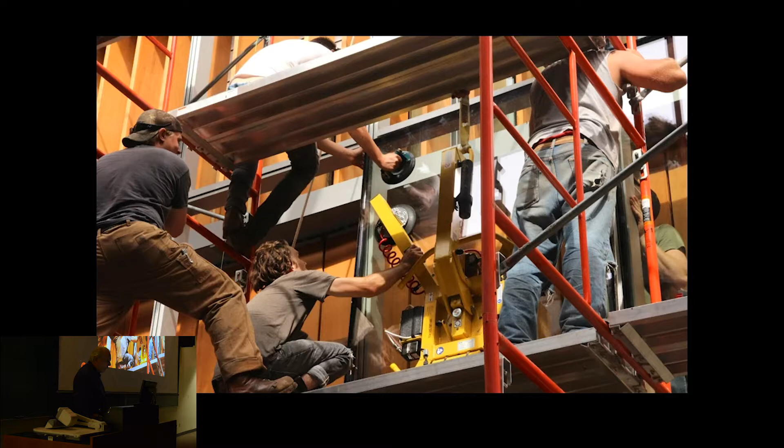And then when it slides in and slides over, it's very, very tight tolerances to do this. And then we can caulk that in, we get that butt glaze, so it's absolutely smooth on the glass surface.

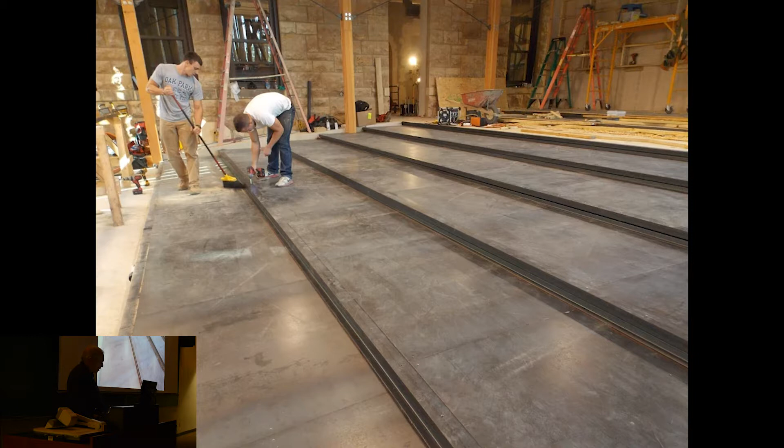So, positive displacement floor system. In LEED, what we try to do is minimize the set points for when we actually dump tempered air in, be it cooled or warmed. So you spread out that temperature range between, say, 55 and 75 degrees.

So when it's like that, we can bring natural air into the building, and it comes in under the floor. What we're doing here is we can open louvers here. It pulls air through the building with fans up here and ventilates it up through the top. Positive displacement ventilation, again, minimizes how much we're using the mechanical system for. We're just gently moving air through the space, and that seemed to be pretty successful as well.

So we redo the interior, the way you gain access to it to get to the space as well, and then a living wall in the back. There's the finished images, and then we have a little jury room behind the lecture hall as well, because we displaced the jury room in order to get through it, which is now the Commons, and then get into this new jury room.

So we finished that. I'll pick up the pace here a little bit. Went back to doing houses, and this is another passive certified house. The average monthly bill for this house is $17 for an all-electric house, and $14 of that is the setup fee.

I do all these projects, but I just don't have the time to be able to go back and reflect. Fortunately, the numbers nerd that we sold this to loves to do this, and so he's the one who's given me these numbers, Mark. And so that stuff works. It's pretty amazing in our climate that you can heat and cool a house year-round for $17 a month.

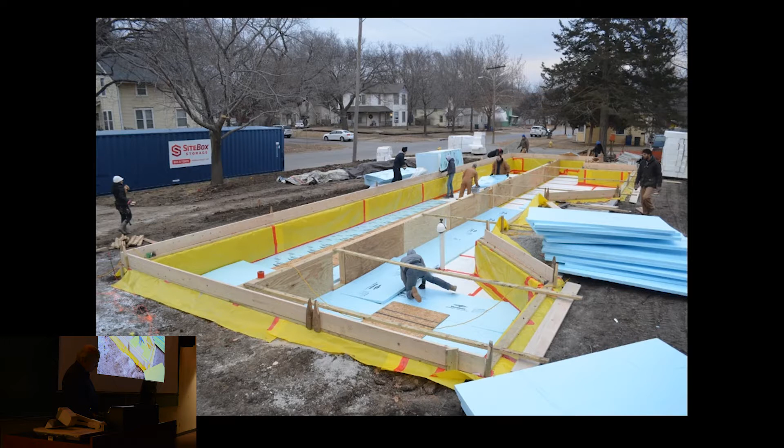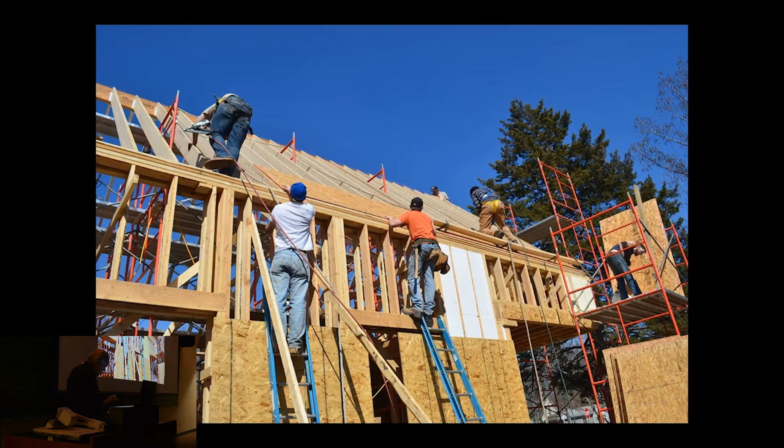Photovoltaics on the roof to generate power.

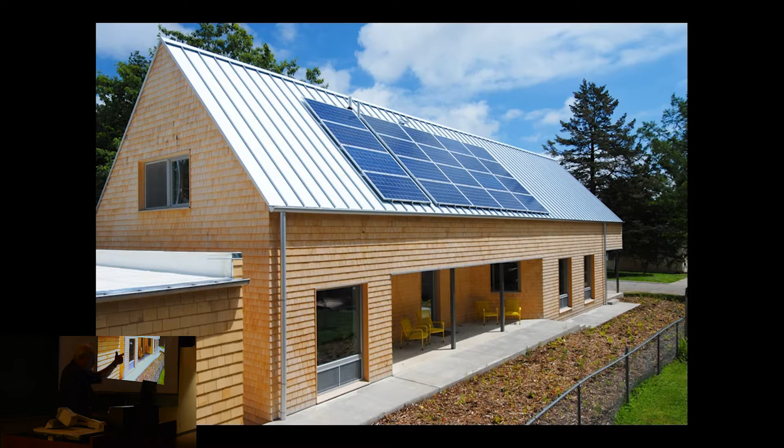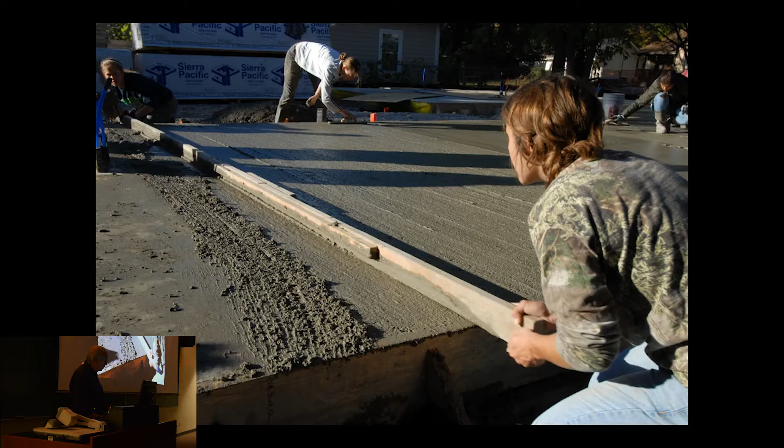Here's another one coming down the home stretch. This one is all made out of repurposed cedar. It's kind of an interesting story. There's Alyssa there, I couldn't resist putting the picture in. One of my students is here, she'd gone through the program, so I thought I'd embarrass her for a moment. She put the concrete in. This house is made out of Western red cedar.

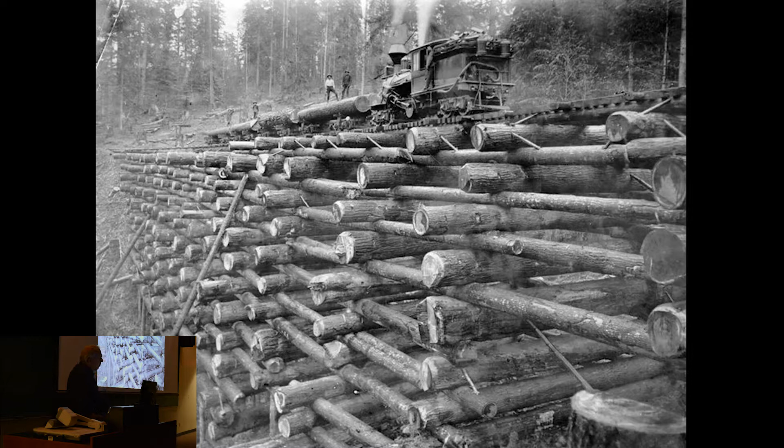The interesting story is it comes from these constructs. In the growth of the housing industry in the late 1800s into the early 1900s, logging companies would descend upon these locales in Washington State, Oregon, mountainous and hilly terrain, and they would have to build bridges to get the train cars in so they could load the flat cars and get the material out. They would use what was at hand, which is basically Western red cedar, and the stuff really never rots.

Now this stuff is available, and we buy from someone who bids these projects to take apart this material, then he mills it into whatever sizes I want, basically enough so it'll stack on a truck, 8 by 2 or 8 by 3, whatever breaks out the best, and it's clear Western red cedar. He ships it to us, and we repurpose it into what you see here. We mill it all down into exactly the size we want.

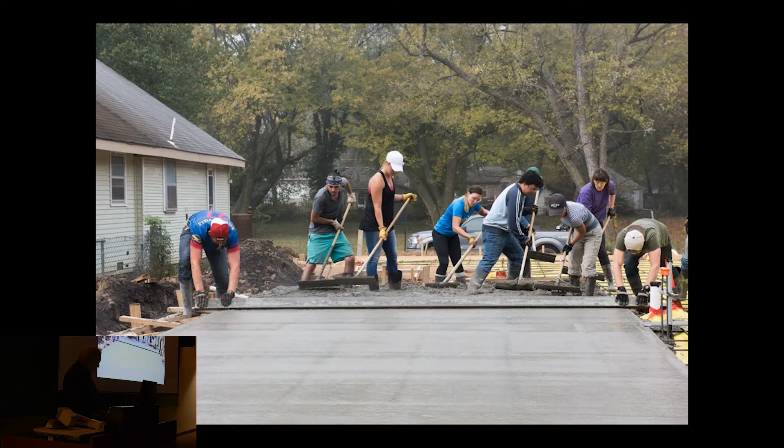And then these screens, so we do our own flat work. Again, we do everything. I call this poor man's terrazzo. As soon as we knock that slab off, we let it cure enough, a couple days, and we come on it with diamond pads. We can grind that head down, and you get a very inexpensive, very interesting floor by just doing that. The diamond pads, although pricey, are a whole lot cheaper than what a terrazzo floor would cost or any other concrete, so it worked out pretty well for us.

This house is in an RS7 zoning. The city is trying to increase the density in the urban area, and I'm all for that. In this case, not only do we have the 3-bedroom house, but we also have the accessory dwelling. The people that bought that now can't meet the demand for the Airbnb, they have so many inquiries in that accessory dwelling.

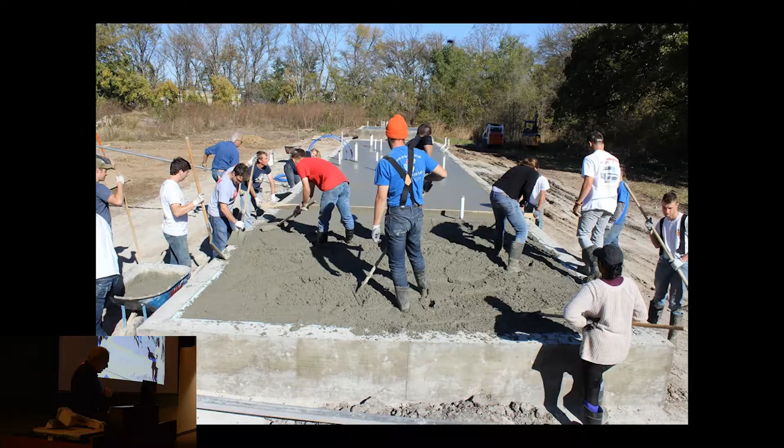Very simple form, again flat work. In this case, it's in a floodplain, and so what we want to do is elevate the building above the floodplain. I love when you turn what you think is your greatest liability into your greatest asset, which in this case is the cantilever. So the building basically cantilevers over all that concrete above the floodplain, which is of course what we had to meet, but then we turned that into something else.

So here we are putting the glass up on the outside.

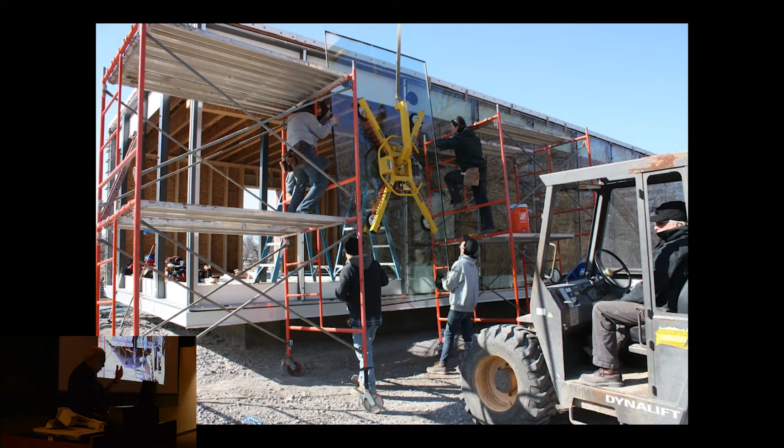We're always in trouble when we come to do our roofing, because usually it's this time of year, January, February, we're trying to get closed in, and we can't do it with the old EPDM TPO systems that are fully adhered, because you can't use the adhesives unless it's a constant 40 degrees, and that's not going to happen by us.

So how about some questions? Sorry, I kind of went over a little bit, I think. Any questions? I have a question.

What are you doing for your structural and mechanical design? Are you using a normal consultant or are you doing that yourself? On the university project, the MEPs need to be sealed, and so in that case we have engineers we've used in the past, and they're happy to work with us. The students are part of those conversations, but it's only for the 4 larger buildings we've done that we've had to do that. For the other 20 buildings, most of it now, any engineering that has to be done, we're getting it through the suppliers, so Samsung, for instance, they'll send their engineers to our job sites and students will work with them. Those engineers will spec the mini splits.

Everybody wants to use mini splits now by us, and they'll spec that. We run all the line set, all the low voltage wiring to it, take care of it, set the hangers for it, get the condensate lines in, and then we'll hang it, but we don't charge the system with refrigerant. That's about where I draw the line, because I don't want the responsibility of the maintenance on it. In the electric, we'll do all the electric, including service entrance, 200 amp, almost standard issue. Plumbing, we set the fixtures, eyeball the rough-in, but we don't do the PEX, having had a bad experience or two.